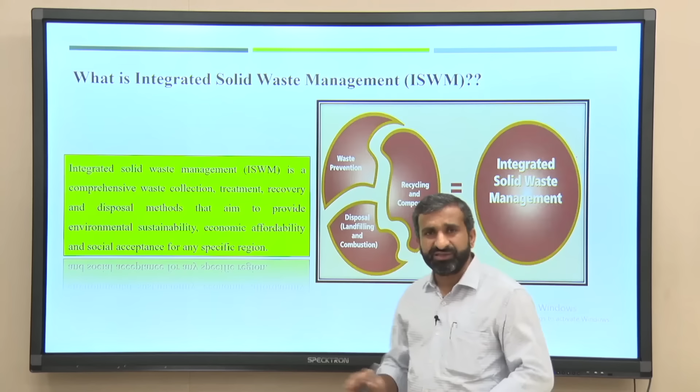It includes all physical elements of municipal solid waste management based on environmental sustainability, the economic way, and finally it should be accepted by the local areas, socially also should be accepted. So this is called integrated solid waste management system.

So when you say the idea about integrated solid waste management strategy, it includes the entire issues about the solid waste management system, like starting from the cultural, technical, economic - all the social as well as economic, technical context - and after that it also includes the waste material, what kind of sources, different stakeholders.

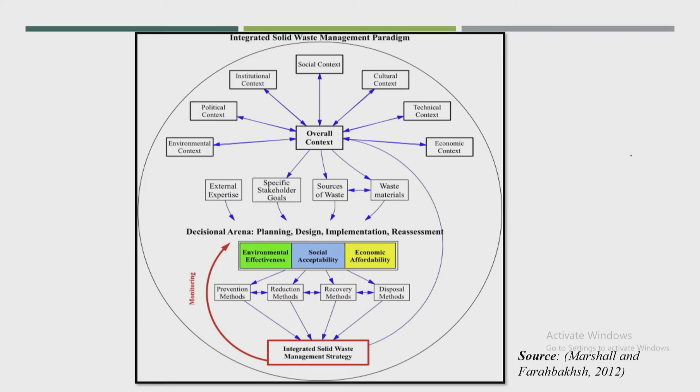And finally it will go to the planning or designing or implementation of the integrated solid waste management plan, and that has to be accepted on three bases like environmental, social and economic constraints, and based on that, how best we can prevent the waste, reduce the waste, recover, or how best we can dispose the waste - that is normally called an integrated solid waste strategy.

So what is the ISWM or integrated solid waste management planning process? Normally it will start from identifying the need, first you identify, review the existing system, review the existing regulations available in the particular region, city or state, and then organize the decision making framework by calling the different stakeholders, and then finally establish the objective.

So once the objective is finalized, then try to identify the potential component - like once the objective comes up, we can go for treatment processes like biological treatment or chemical treatment kind of processes - then see the potential component of that, then compare the options available, and based on that you develop the integrated solid waste management plan.

And once the plan is ready, try to implement it as best as possible, and then evaluate the complete waste management system. So if you are not meeting the particular objective or it is not possible to achieve, then again go through the same process. So likewise we can go for integrated solid waste planning.

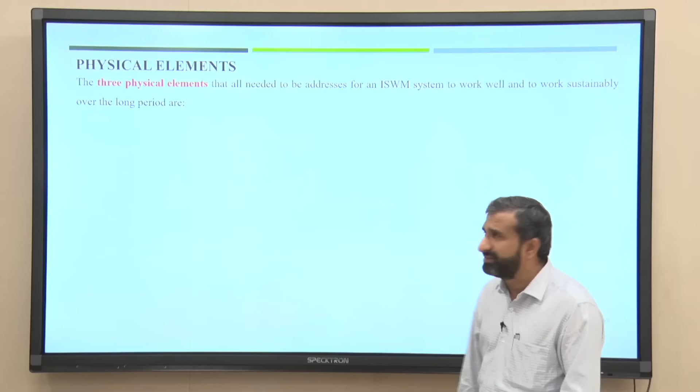Now when you say the integrated solid waste management plan or system or strategy, normally we talk about 3 physical elements and 3 governance features. So there are 6 features or elements that need to be discussed under the integrated solid waste management plan, strategy or process. So first we will start with the physical elements.

So there are 3 physical elements that need to be addressed. The first is public health. Now the benefit of ISWM is that normally we call it proper collection. So rather than calling it collection, why not call it public health? So the objective could be how best we can see to the public health of the local people.

So, how can we maintain public health properly by maintaining healthy conditions in urban locations, particularly through good collection services. Suppose house to house collection systems are available, like started in the Swachh Bharat mission, that is the best kind of primary and secondary collection possible. But if collection or storage is not good, a lot of public health issues will come up.

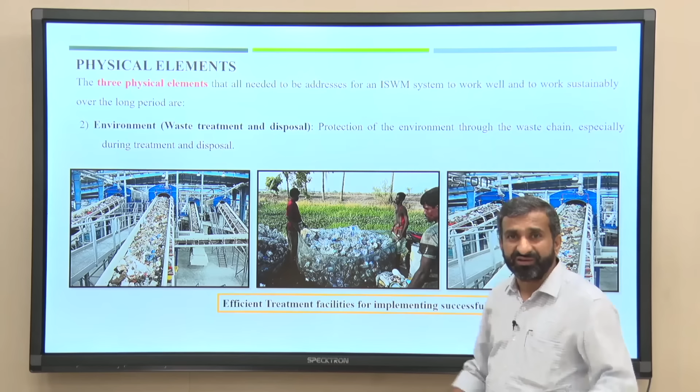Next is the environment. How best can we maintain the environment? This environmental condition will be maintained especially by waste management, waste treatment and disposal. If you are able to treat properly all kinds of collected waste, and also ensure proper disposal of the entire waste, then it is good for environmental conditions in the local area, through proper protection of the environment across the waste chain, especially during treatment and disposal.

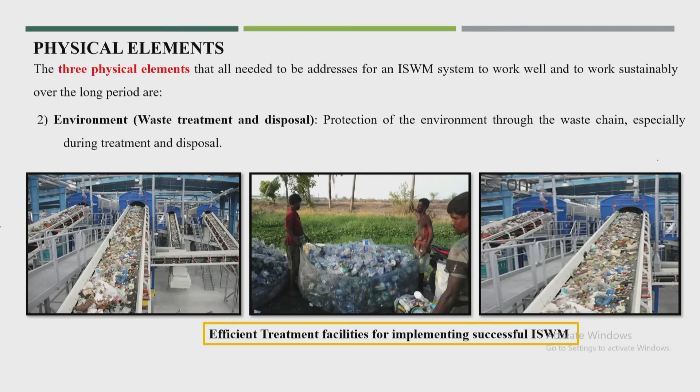If you have a proper recycling process, which I showed in some photographs, proper treatment process, and proper sanitary landfill facilities available in the city, then we can easily maintain the environmental condition in the local area.

And the third point is resource management. This is also one of the most important physical elements of ISWM, and this resource management could be possible by proper recycling of dry waste and also by getting products from organic material.

So in this, if you talk about the 4 R's, normally we know the 3 R's which I am showing in the next slide. The 4th R is about closing the loop by returning both material and nutrient to beneficial use, through preventing waste and striving for a high rate of organic recovery, reuse and recycling.

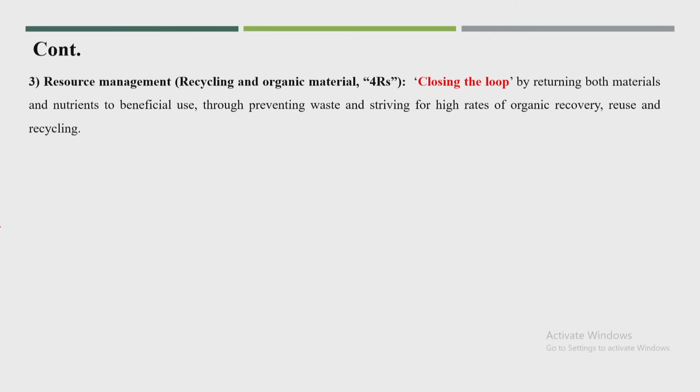This physical element, normally when you talk about the solid waste management plan, we will talk about collection, treatment, and disposal also. But these physical elements are not complete until you talk about resource management, because a lot of materials are recyclable, and a lot of material can be treated to get a product out of that. So that is the important one.

Now, when you talk about treatment also, always think about how best you can get some kind of resource out of that. For example, most dry matter like metal, glass, paper, rubber, leather is all recyclable, and this becomes a very good resource. Most of these materials are also combustible, so you can get energy out of that, which is another very good product or resource generated.

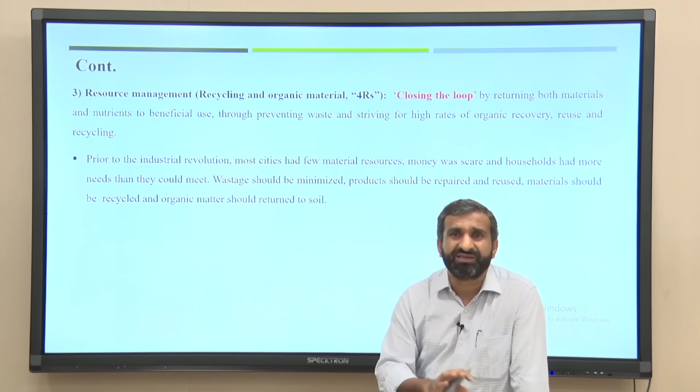And when you talk about biological treatment processes, in composting, obviously we will get very good quality compost if you are able to manage a proper composting plant. In anaerobic digestion, you will be able to produce methane gas, which is also a very good renewable kind of energy produced from the anaerobic digestion process. So almost all treatment or recycling processes are able to produce resources out of that.

So normally this resource management in most cities is not done by the formal sectors like the corporation, because they are all busy with collection and disposal only, and that kind of fund is also not available with them.

But it is good that with the Swachh Bharat mission, most cities got a good amount of funds. So let us see, many cities will come up with treatment facilities or proper disposal facilities. But right now, this informal recycling sector saves around 20% of the waste management budget, because a number of recycling facilities are available from the informal sectors.

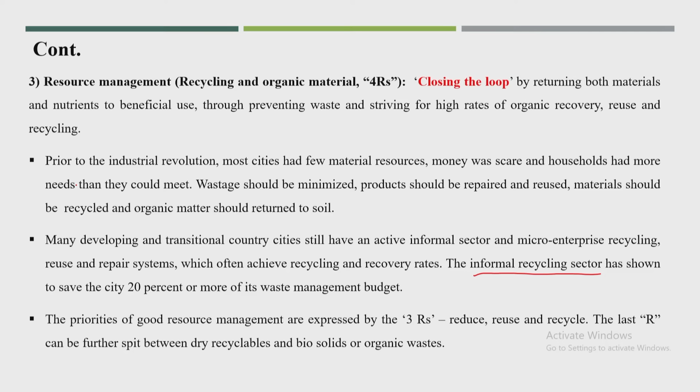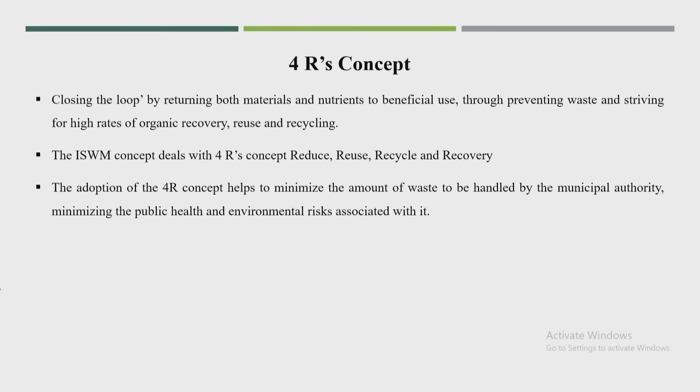So the 3 R's are reduce, reuse, recycle. This is the 4 R concept. Normally this 4th R is especially given for developing countries, especially like India. So, closing the loop by returning both material and nutrient to beneficial use. The 4 R's mean: first is reduce, as much as possible, reuse as much as possible, and recycle.

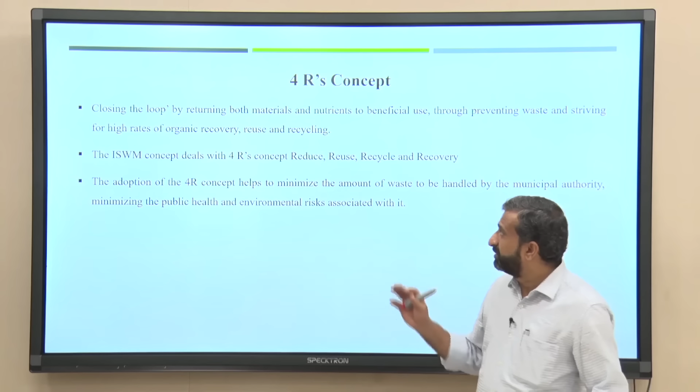And now the 4th R is special: this loop gets closed by returning material or nutrient to beneficial use. This is especially what many textbooks write as 'recovery'.

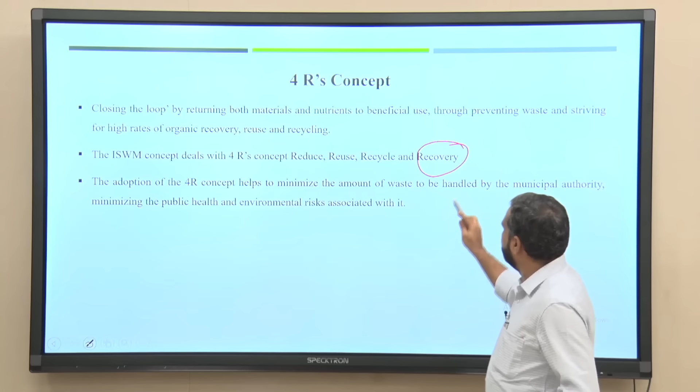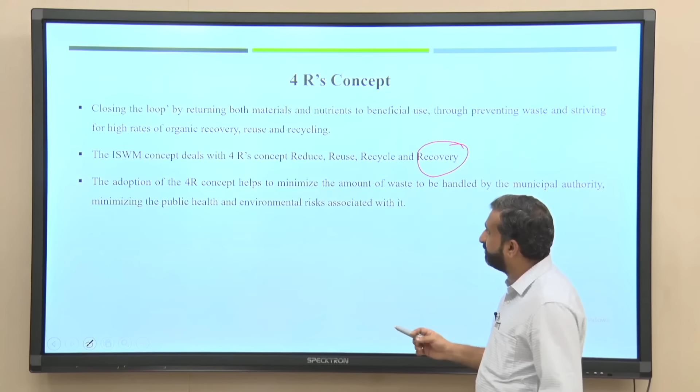I put it here because most textbooks also include this recovery one, but recycle is also one kind of recovery. Rather than recovery, the important thought for developing countries like India is that this R is for return nutrients to soil. I think that is the best word.

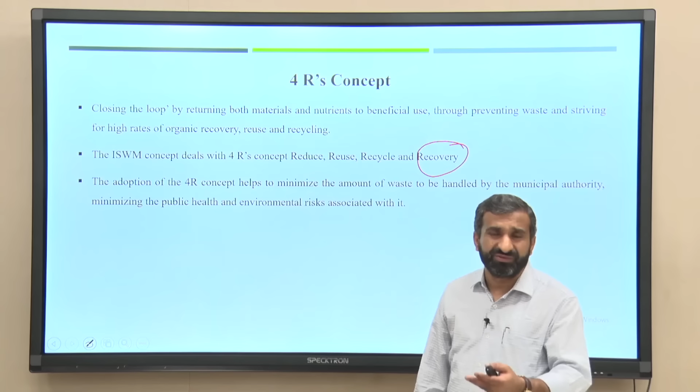What is the definition of return nutrients to soil? How are the nutrients returned to the soil? By producing compost from the wet waste. This compost has a lot of nutrients, and these nutrients get returned to the soil, because the same nutrients were taken from the soil to come up as food for humans. So why not return the same nutrients to the soil? This is a good idea for developing countries like India, South Asian countries, or even African countries.

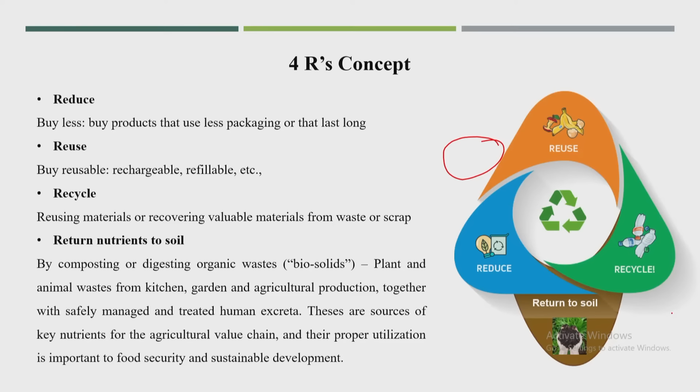So it is reduce, reuse, recycle, and return nutrients to soil. By composting, we can easily return these nutrients to the soil. So it will close the entire loop.

Now whatever plan you make, it should be inclusive. What is the meaning of inclusive? It means it should have contributions from all the stakeholders. This is one of the very important points.

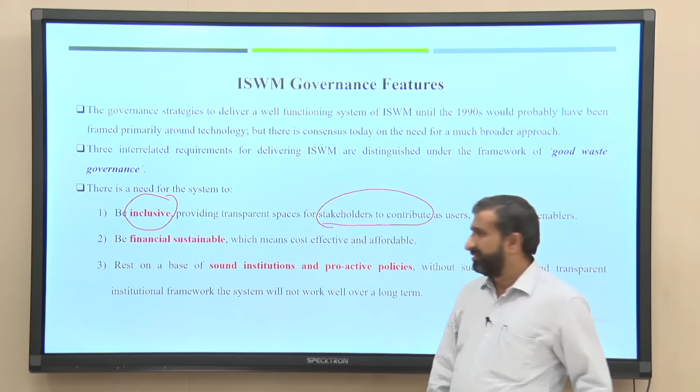Next is sound institutions and proactive policy. This is another very important governance feature. In India normally we do not have sound institutions. You can say we have Swachh Bharat mission started by ministries, but these ministries are working for total environment. The rules are made by one special ministry called Ministry of Environment.

But we need sound institutions, we need some special institutions, even academic institutions we do not have. Did you find anywhere a special degree on solid waste management? For even solid waste management, to study this course you have to get admission in IITs or very big institutes in India, after passing the GATE exam with a very good score, then only you will get admission in such colleges, and then only you will study these kinds of courses.

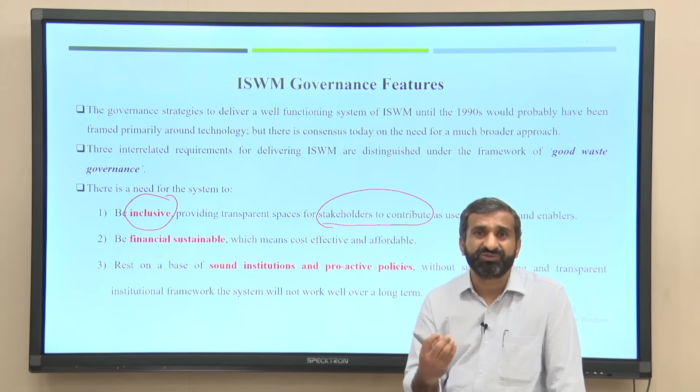So you require that, and the problem is that a lot of manpower is involved in solid waste management programs, but are those manpowers skilled? No, they are learning by working in the plants. So, they do not have skill. So, for skill you require special institutions to create the skill in those manpowers.

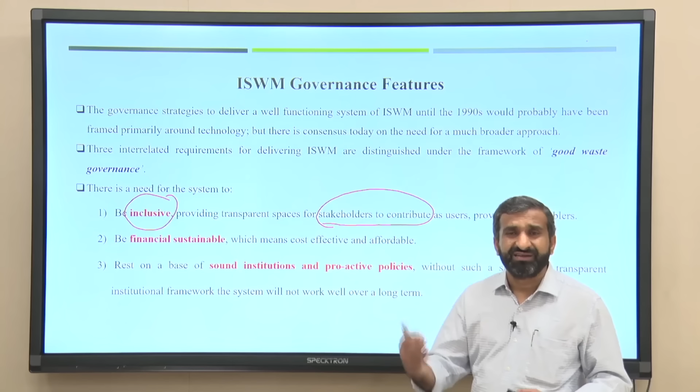And also we require special proactive policies, so that every year the local authority gets some fund. It is not that once in 15 or 20 years you give one capital fund, maybe a few crores, and ask the local authority to start some plants and run it for the next 20 years. That is not possible, because continuous funding should be available. Until the local authority achieves sustainability, you need to fund them, and particular policy should be required.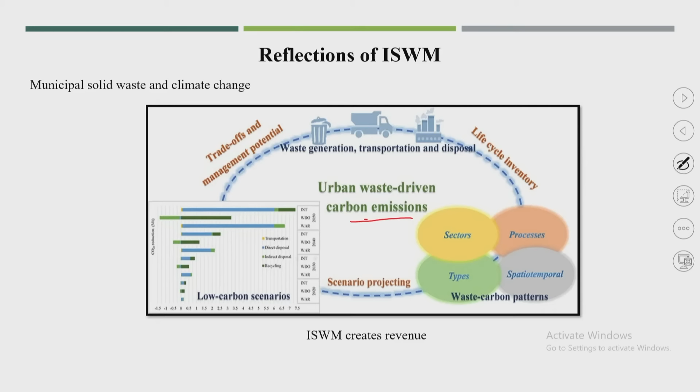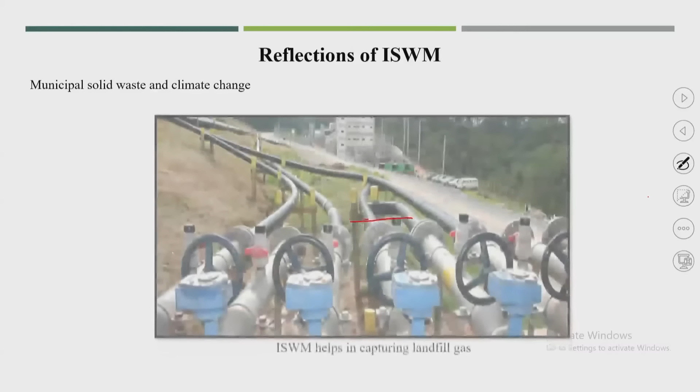Now, there are some reflections of ISWM with municipal solid waste management and with climate change also. If you have a proper integrated solid waste management plan, you can reduce carbon emission, and because of this we can get a lot of fund by low carbon scenarios and waste recycling. So we can maintain proper climatic conditions by waste recycling, by capturing landfill gas, so that it will not create problems to the environment.

It is not only that males are working for waste management and females are not, or only females work for street sweeping and are not allowed at disposal sites. It should not be like that. Try to maintain female equity, because there are a number of manpowers working in solid waste management projects.

Similarly, informal sector integration—this we have seen in the governance features also, inclusive. So inclusive is not only government participation, government companies or government authorities, but also the informal sector should be integrated, like NGOs, CBOs, community based organizations, self-help groups, some private sector. In 2006, when these PPP projects started under the JNNURM program, this discussion had also started there.

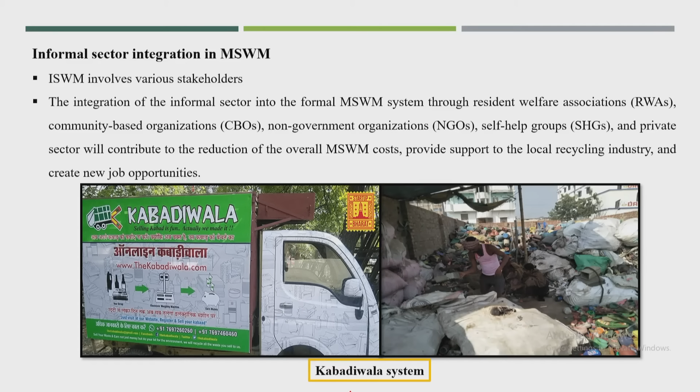Likewise, there is the kabadiwala system. There are a number of kabadiwalas. Why not include such kind of people as well? Also, there is news that waste pickers hold public hearings and raise issues.

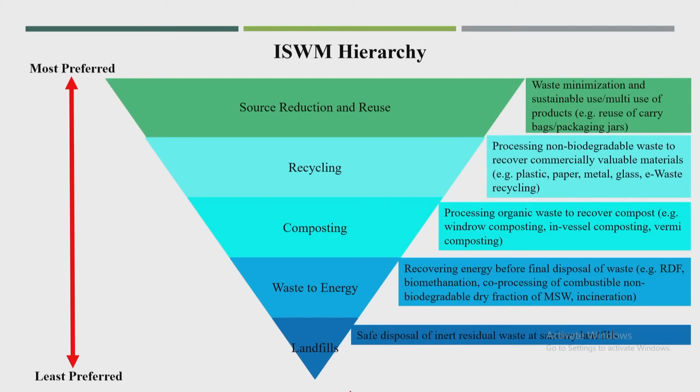Now, when you talk about the hierarchy of integrated solid waste management, what should that hierarchy be? This is the order from most preferred to least preferred. First is source reduction and reuse - this is the most preferred point, followed by recycling.

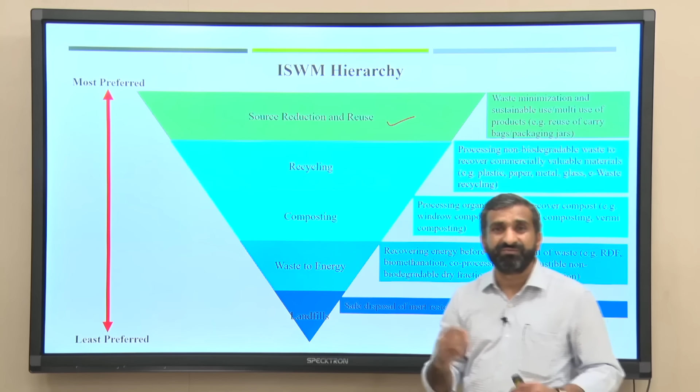When you make a plan, first think about how best to reduce or reuse the waste - that should be the first thought for local authorities planning solid waste management. Then consider how best to recycle all valuable matter, and once reduce, reuse and recycle are done as best as possible, then consider composting.

For all your biological waste, figure out how best to take it out for composting, or biogas facility, anaerobic digestion facility. Then finally consider waste to energy, from which we can get some energy - biomethanation or anaerobic digestion can also be proposed under waste to energy. Finally, landfilling is the least preferred option. Whatever is not possible for source reduction, recycling, composting, or waste to energy, goes to the landfill area.

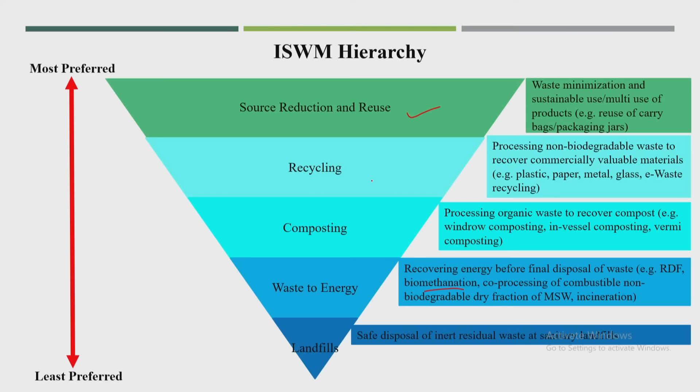That is the proper hierarchy of the integrated solid waste management strategy or plan. But in India, rather than discussing this, we directly go for landfill. So our most preferred option becomes landfill, and only then do we talk about recycling, composting or waste to energy. That is not a good idea.

I personally believe this approach is very good for corporations, because in India there are a number of class 2 and class 3 towns where the population is around 1 million to 0.1 million, residing at district or taluka level. If you talk to them about preparing a solid waste management plan, many of their staff are not well aware of plan preparation. So this approach will help those corporations where proper staff are not available to understand it, and by this way they can come up with a particular plan.

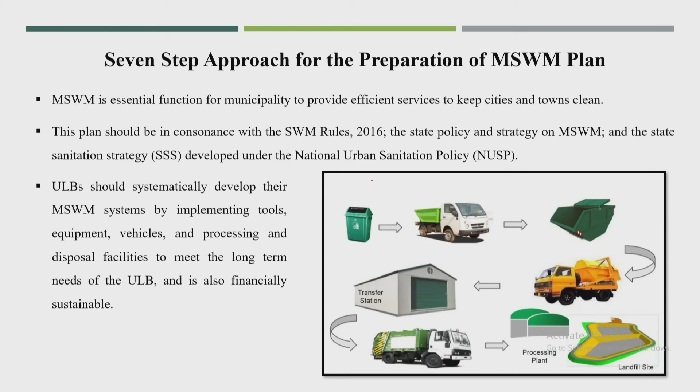So these plans should be along with the SWM Rule 2016 and the state sanitation strategy developed under the National Urban Sanitation Policy. The ULB should systematically develop their MSWM system by implementing tools, equipment, vehicles, processing and disposal facilities to meet the long term needs of the ULB, and it should also be financially sustainable. So these are the different steps.

Step 1 is policy, program and legal framework. Step 2 is assessment of current situation and gap analysis, and the stakeholders are also given here. In step 1, what will be the stakeholder? In step 2, assessment of current situation, gap analysis, what are the stakeholders, or what are the aspects that have to be looked into in this particular step? Third is...

Step 3 is stakeholder consultation for MSWM planning. So once you come with the assessment, current situation, gap analysis, we come up with the stakeholder consultation, and based on that consultation we come up with the preparation of the draft MSWM plan, where with the population forecast and different rules and regulations, you can come up with the draft proposal.

Then, once the draft proposal is ready, they need to go through step 5, schedule for implementation. So timeline, manpower, financial viability get prepared, and once the draft proposal with the schedule is ready, we again go for stakeholder consultation, back to step 3, and have discussion there with all the stakeholders. Once everything is accepted by all the stakeholders, we go to step 7, municipal council approval for the MSWM plan and implementation, including PPP.

So once step 2 is known, we can go to stakeholder consultation and tell them: this is what the current situation is, and based on the current situation we come up with particular gaps. Gaps could be like we do not have a treatment facility, we do not have a sanitary landfill available, and the current situation shows that the waste is highly biological in nature, which could produce good quality product through composting or biological treatment facility, and we also require a special facility for sanitary landfill.

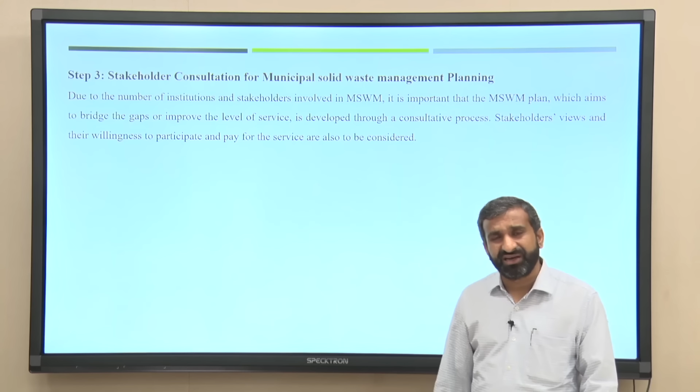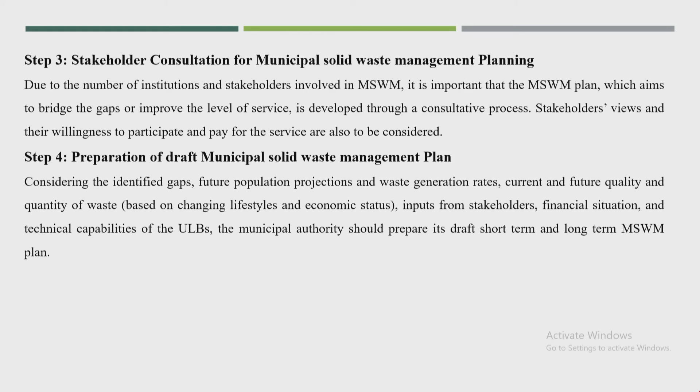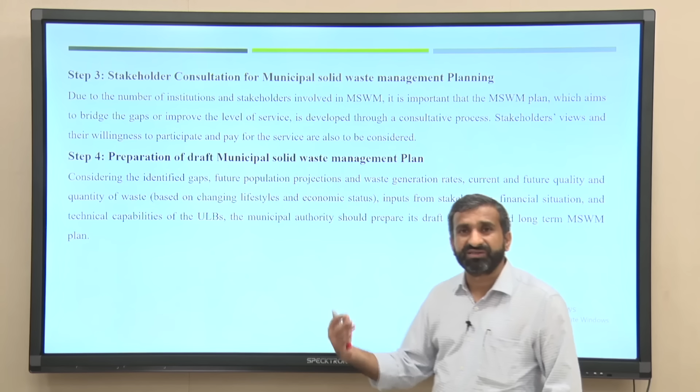Likewise, we can share with the stakeholders and have discussion with them, and once the discussion is over, then we can come up with a draft municipal solid waste management plan. This draft plan can be prepared by sitting with all technical people in the corporations, or with outside academicians or researchers, whose participation is also possible in the preparation of the draft proposal.

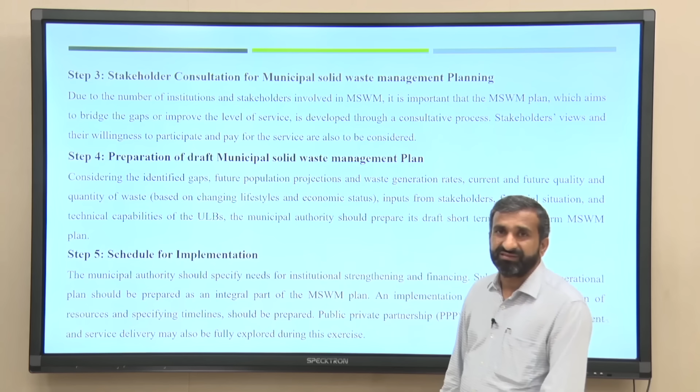Then create the schedule for implementation, because the timeline, financial viability, and manpower requirement have to be discussed. Once that is over, again you go to the same stakeholder consultation and share with them what has been thought of in the proposal.

When you are planning for an incineration facility, you need to talk about it with the stakeholders. If they start an incineration facility, all the recyclable materials they collect will not be available, so they may oppose it or not find it beneficial. In that case, we go back to the draft proposal preparation. So, we can go again and again with the stakeholder discussion.

That is why step 3 and step 6 are specially given for stakeholder discussions, so that every time a proposal is created, there is discussion with the stakeholders. Finally, once the stakeholders accept all the points of the proposal created by the local authority, it goes to the municipal council for approval of the solid waste management plan, and finally this plan is accepted and implemented. So, this is the best way to prepare the solid waste management plan.

Now the role of state and regional level authority: the secretary in charge of the urban development department of the concerned state or union territory has overall responsibility for implementation of the MSWM system in cities and towns in line with the SWM rules. The same urban development department is required to prepare a state policy strategy for the MSWM plan, and has to report to the state bodies for SWM service provision, and ULBs report to the Ministry of Urban Development. The same UDD is also responsible for approval of land transfer from the state to ULB.

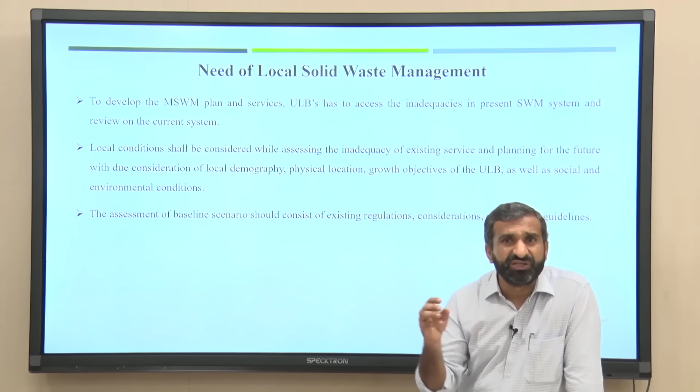We have to go for depression kind of landfills, but if you have the landfill in hilly areas, there are a lot of leachate production and pollution. In both cases, local conditions say that more treatment facilities should be provided. Rather than looking at other states in other parts of India, they need not have similar facilities. So house-to-house collection in a segregated way and treatment is more priority rather than landfilling. This is what local solid waste management plans need to discuss. So these are the solid waste management strategies for managing this type of waste.

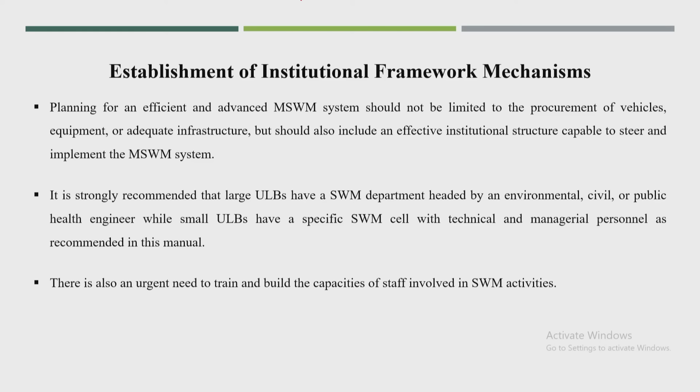Now the establishment of institutional framework mechanism. Planning for an efficient and advanced MSWM system should not be limited to procurement of vehicles, equipment, and adequate infrastructure, but should also include an effective institutional structure capable of steering and implementing the MSWM system. It is strongly recommended that large ULBs have an SWM department headed by an environmental, civil, or public health engineer, while smaller ULBs have a specific SWM cell with technical and managerial personnel, as recommended in this manual. There is also an urgent need to train and build capacities of staff involved in SWM activities, and adequate and appropriate personal protective equipment should be provided to all employees and workers.

Whatever plan or strategy we make for solid waste management should include the understanding of integrated solid waste management strategies. By that we will be able to achieve proper environmental conditions or proper living conditions in the city, while managing, disposing, and treating solid waste in a particular region. So, thank you.